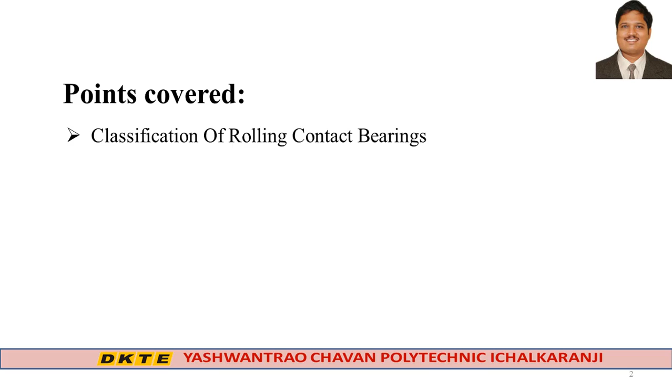Next one is the self-aligning bearings. They are called self-aligning bearings because they allow the shaft to deflect through 2 to 3 degrees. They are of two types. One is the externally self-aligned bearing: the outer diameter of the outer race is machined and ground to a spherical surface which fits in a mating spherical surface of the frame or housing. The next type is the internally self-aligned bearing: the inner diameter of the outer race is machined and ground to a spherical surface.

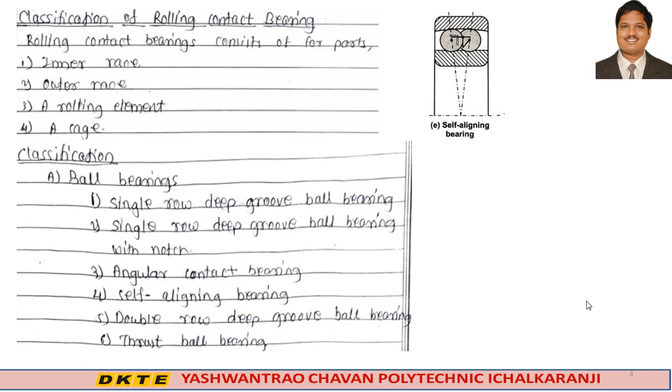Next type is the double row deep groove ball bearing. These bearings can be made with radial or angular contact between the balls and races. They consist of two spherical balls as rolling elements as compared to single row deep groove ball bearings. Pairs of two spherical balls are positioned equally across the circumference of the bearing between the inner and outer races. Due to two rows of balls, radial and thrust load carrying capacity of these bearings is high.

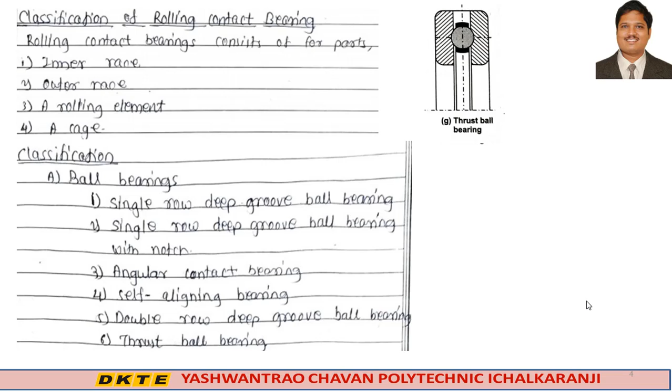And last is the thrust ball bearing. They consist of spherical balls running between two rings, the shaft ring and the housing ring. The shaft ring rotates along with the rotating shaft such that its machined surface which makes contact with the balls is perpendicular to the axis of rotation. These bearings can take only thrust, meaning axial load, and no radial loads. These are the types of ball bearings.

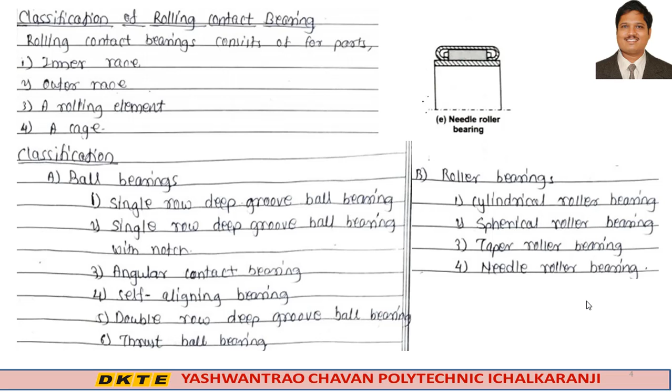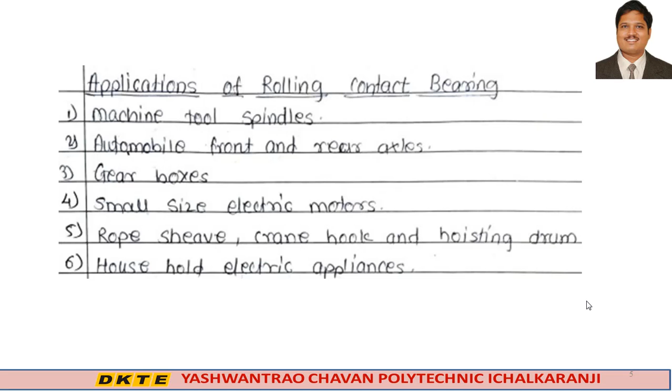These are the detailed classification of the rolling contact bearings. Then what are the applications of rolling contact bearing? First is the machine tool spindle. Machine tool spindle मध्ये आपण यूज करत असतोय. Second is the automobile front and rear axle. Third one is the gearboxes. Fourth is the small size electric motors. Next, rope sheaves, crane hook and hoisting drum. And last is the household electric appliances. These are the applications of rolling contact bearing.

Then advantages and disadvantages of rolling contact bearing. First is the advantages. First advantage is that rolling contact bearings need low starting torque as compared to sliding contact bearing.

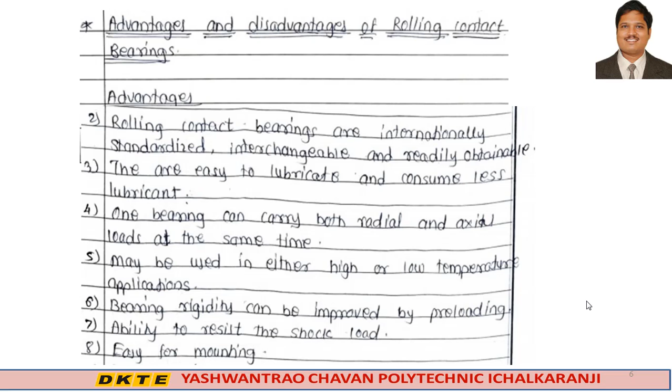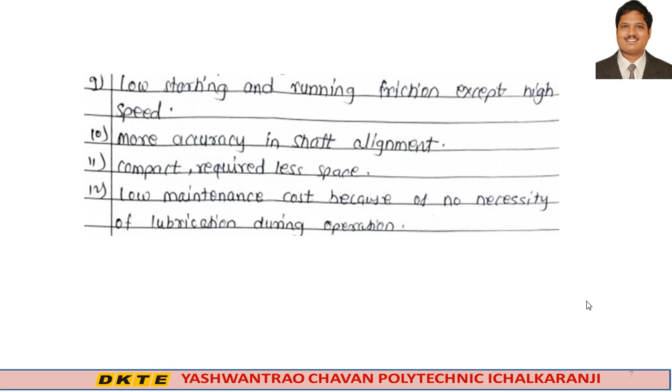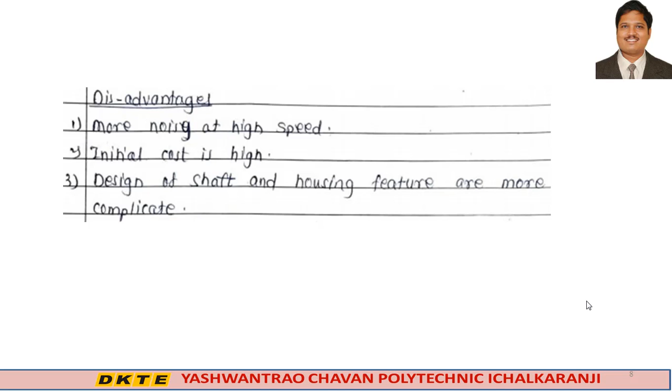Compact, requires less space. Low maintenance cost because of no necessity of lubrication during operation. These are the advantages. And disadvantages are more noisy at high speed, initial cost is high, and design of shaft and housing feature are more complicated in this rolling contact bearing. These are the disadvantages. Next, now we will see the comparison of rolling contact and sliding contact bearing.

In last lecture we saw the sliding contact bearing and today we saw the rolling contact bearing. Then what are its comparison points? First is, in sliding contact bearing size of bearing is large for same load carrying capacity, and in rolling contact bearing size of bearing is small for same load carrying capacity.

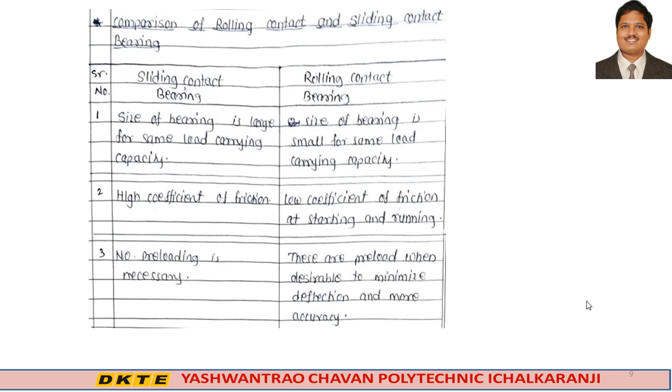In sliding contact bearing, no preloading is necessary, but in rolling contact bearing, there are preload when desirable to minimize deflection and more accuracy. Next is, in sliding contact bearing life is less and rolling contact bearing life is larger. Cost of sliding contact bearing is less and cost of rolling contact bearing is more. Shaft and housing feature is easy in sliding contact bearing, and in rolling contact bearing shaft and housing feature is complicated.

Resistance to the shock is higher in sliding contact bearing, and in rolling contact bearing it is lower. In sliding contact bearing housing diameter is less, and in rolling contact bearing it is large. In sliding contact bearing, due to lubrication, less sensitive to dirt. जे dirt particles असणार आहे त्याला हा कमी sensitive असणार आहे. In rolling contact bearing, they are sensitive to dirt. Okay, this is the comparison of rolling contact and sliding contact bearings.